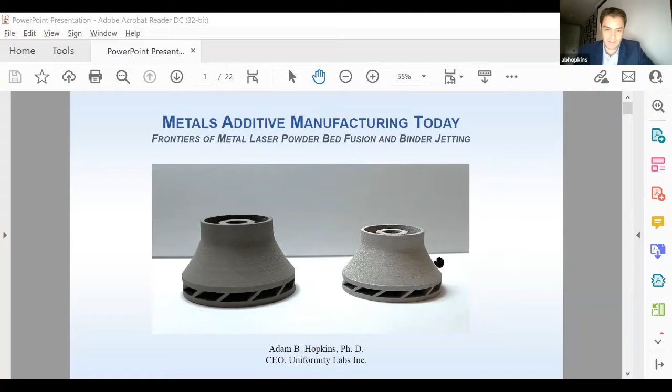Great, okay, let me go to full screen mode here. All right, background's covered. I'll start with an overview of technologies.

Then I'll go into detail about laser powder bed fusion and its physics, borrowing from the work of peers—a lot of the work at Lawrence Livermore National Labs is quite exciting on this front—and areas of potential for development, where the challenges are in laser powder bed fusion. I'll focus on the most salient technical challenges that I don't think the commercial world can meet, where there's great opportunity for national labs to step in, or where they've already stepped in, or for academic work to solve problems that might otherwise not be solvable by the commercial world. Then I'll move into binder jetting, same type of story.

And I'll talk about data collection, because there's not enough of it right now to actually do a solid job of addressing some of these problems.

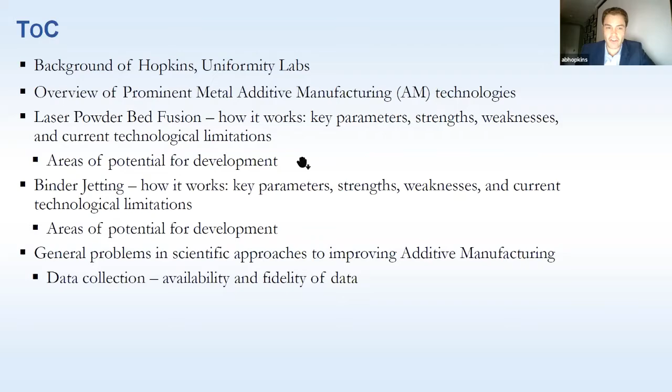So some background on Uniformity Labs: it's an additive manufacturing feedstock company that also develops print solutions. We have 8 large or medium format industrial printing machines for metal additive manufacturing—5 laser powder bed fusion, 3 metal binder jetting. We work at the forefront of printing technology, deploying these ultra-dense powders, which are roughly speaking a bunch of big particles with different sizes of smaller particles filling the gaps between them. There's a little more to it than that, but for now I'll say that, and we work on deploying these products and learning how to print them in these machines.

In this process, we work with some of the most advanced experimental printers out there, so we gain a pretty good view of what the problems are—not just with today's commercialized technology, but with technology that might be commercialized in 5 to 10 years.

So, some more stories there. We have various raw materials. We've developed, I believe, as many or more raw materials for binder jetting, different alloy classes, than anybody else on the commercial front. We have those available.

And with respect to powder bed fusion, we have materials available as well that introduce substantial changes into the physics. I'll only bring this up not to tout our company, but to point out that by changing the feedstock and changing the parameters in laser powder bed fusion, you can enact rather substantial changes. You can, for example, print with 2 to 3 times the throughput without changing laser power. You have to change laser speed, scan a little faster if you want to print faster. But then the result is the physics can be modified to achieve more reliability, less residual stress in the process, faster printing - things the industry needs.

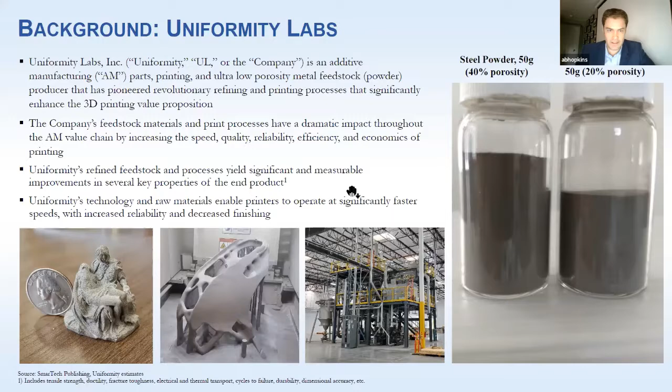And then you scan a laser across the top in the outline or profile of the part you want to print. So if you wanted to print a pipe or an annular ring, you'd roughly speaking scan in a circle, and you'd melt. You seek to fully melt, in laser powder bed fusion, that circle, and then you drop the build stage, spread more powder on top, and do it all over again. At the end of the day, you've got a pipe sitting in a bucket of powder, fully ready to go, possibly with some residual stress.

Great - what are the advantages of this technology? It's very highly accurate, but you do have to deal with residual stress warpage as the part cools. But you can meet machining tolerances in many cases, provided you're properly supported. That's a big deal for the industry because almost every complicated assembly of parts is in fact specified to CNC machining tolerances. So you really want to meet those or come close, so that you don't have to take your part out of the build bed and throw it into a CNC, because that's very expensive.

It works very well for easily weldable alloys - eutectic alloys for aluminum like AlSi10Mg or A357, 356, that's an aluminum silicon alloy. It doesn't work very well - I'll give an example later - right now for, although there's some good work on this, for example, aluminum 6061. 6061 is the most commonly machined alloy in the world by tonnage. I think together all tonnage of 6061 machined exceeds all tonnage of all other materials in CNC machining. So it's an important one, but it's non-eutectic.

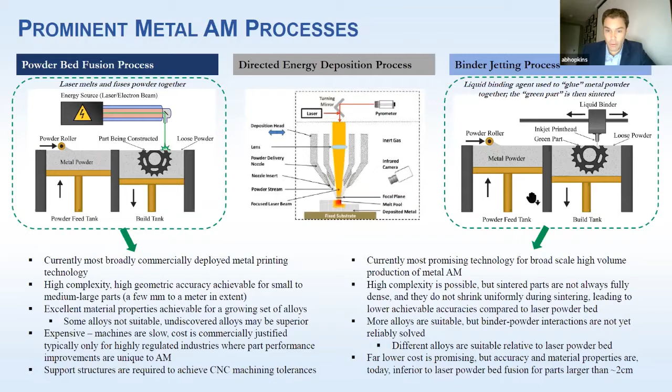So if you want to think about deploying additive manufacturing in metals in the hundreds of thousands of tons, and we are thinking about this in the industry and looking to this in the future, say in the automotive industry, which is investigating it and spending money on it, then you need to be able to accurately build larger parts. For that, you need to address the shrinkage problem, the cracking problem, and the mechanical properties of the material. Most importantly, it needs to be repeatable.

Great, so jumping into powder bed fusion. I'm going to do a quick primer based on a few papers I've pulled from Lawrence Livermore, as well as from Uniformity results. If you don't know much about laser powder bed fusion and want to know more, I highly recommend these references. Great work once again.

The metal below the laser absorbs most of the laser energy. The powder absorbs a little bit of it. And then as you move, you create this melt pool. Particles are blasted all over the build chamber, as you've seen in high-speed videos. They fall in from the sides of the melt pool into the melt pool, and they fly out - basically they're little rocket ships. They get very hot very quickly, plasmarize or vaporize, and it ejects them very quickly. I'll show some data on this in a minute. And some of them stick and melt.

You also have Marangoni convection going on here. As you move the laser away, this lower density, extremely hot melt is at vaporization or close to it in some parts of the melt pool. As it cools, you have Marangoni convection - the lower density cooling metal pulls the metal from the hot spot backwards, in the opposite direction of the scan track. And that's what fills in the gap.

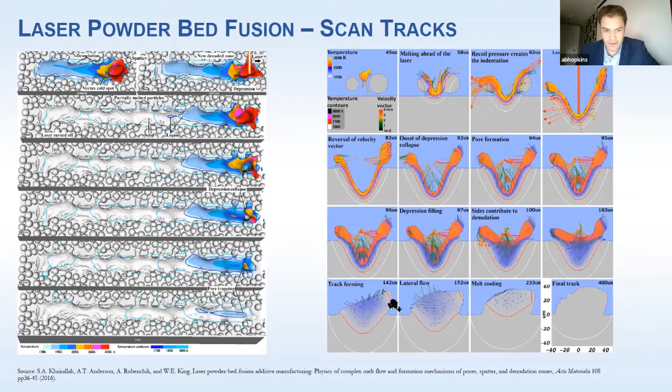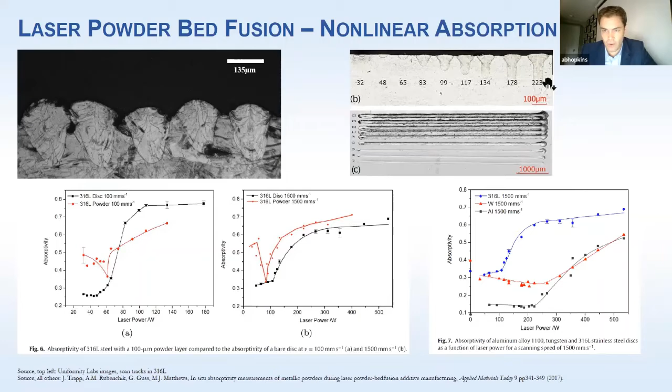This matters because if your energy intensity is too high, you'll overheat aluminum. I think I've got a chart here. Yeah, there we go. And as you overheat that aluminum immediately adjacent to where your laser beam is - let me skip back so I can tell you what I mean. If this is your drill, your scan track here, then by adjacent I mean to the left and right of this image - in the lateral directions, not in the buildup direction.

And what happens is you have supersaturated hydrogen in aluminum and some other materials in that solid. If you have too much intensity, you heat that solid, and by the time the supersaturated hydrogen comes out of solution and drifts into the melt pool, and when it reaches the melt pool, the time scales are on the order of tens of microseconds for the solid diffusion of hydrogen at high temperatures - not for the liquid - such that the liquid at the top of the track has cooled, and you end up trapping the hydrogen.

For the liquid supersaturated hydrogen, that just leaves in nanoseconds or even picoseconds. You don't care about that. It's the supersaturated hydrogen in the solid that matters.

And here's what happens. So if you have this spot, D4 sigma 56 microns, it's this regime where we're getting that supersaturated hydrogen migration into the melt pool, and it's being trapped. And then if we change the spot, all parameters identical, to 92 microns - so just a little bit of a change in spot diameter - you can see you get rid of most of the hydrogen porosity because the length scales and time scales are not proper for retaining that hydrogen in this particular case. All right, great.

Energy intensity - I've given just an example of why it's important. Energy density is, for most alloys, the most important parameter.

And I'll focus on one thing: if you have denser powders on the bed, for example, I mentioned this earlier, then the energy densities you can print at - for example for 316L - you can go into the 26, 28 joules per cubic millimeter range, which there's a whole mountain of commercial papers out there saying is impossible. You have lack of fusion everywhere, you have defects everywhere. What do I mean by that?

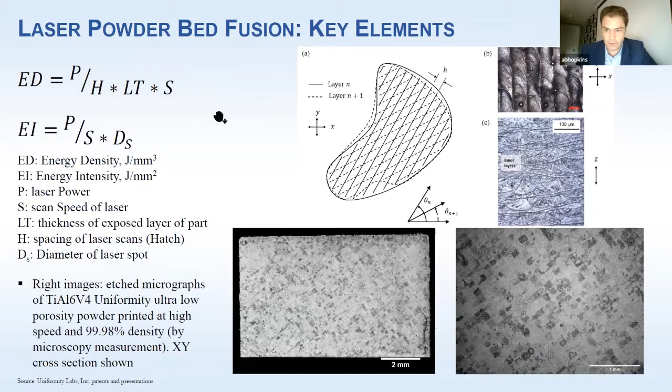Hold on, I think I have some pictures. Oh, I may not, so I won't scan around, but you get these giant defects - you get 95% density. With respect to, if you have a very dense powder on the bed and your melt pool is therefore cooler because you have more powder falling into the melt pool, as well as you have smaller particles as well as larger particles, you might be absorbing more energy from those particles because the smaller particles are like little antennas - they have plasmonic resonance with the laser beam.

If you tune everything properly, cutting to the chase, you get a lot more melting per scan track, and you can go to very low energy densities. But typically you're on the order of about 60 to 80 joules per cubic millimeter printing today. With special powders, maybe 20 to 35. So, non-eutectic alloys - I'll briefly mention aluminum 6061. I talked about this earlier in brief.

You can see here hot cracking—this is not even etched material. This happens because if you look at the phase diagram of 6061, you have a copper-rich or alloying-element-rich phase that solidifies before the aluminum phase, rapidly solidifying. Since it has a different density than the aluminum, it solidifies, and then the aluminum solidifies separately because of the different densities in solid form. Then you get these cracks in your structure, and this material becomes more or less useless for structural applications because it's full of cracks.

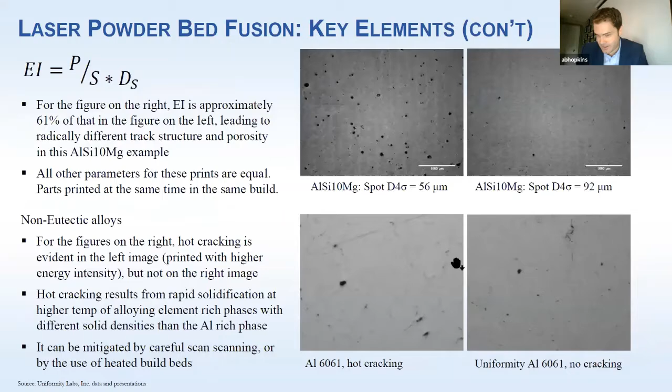The build bed temperature—I think I even forgot to put this on here—makes a massive difference in aluminum 6061 hot cracking. Your mechanical properties would be radically different for a build bed temperature of 300 degrees versus 100 degrees, so you need to pay attention to that. The powder size, if your powder was 60 micron D50 monomodal as opposed to 40 micron D50 monomodal, you'd see a radical difference. The D90 and D10 of the powder matter as well—just again and again and again. This is the biggest problem in learning from the data that's out there: you need more data. You need to really know what happened, or the conclusions you draw may be erroneous.

And then doing all this, the question is, if you are tracking all this, if you have a stable parameter set—and by parameter set I mean powder, layering, scan strategies, beam spot size, the whole story, environment—then there are certain part geometries that you can create that warp and do not warp, that oxidize and do not oxidize, again very material specific. Aspect ratios you can print and cannot print relate to residual stress. This becomes, again, a pretty complicated problem.

There are softwares out there that bring this into the thermoelastic regime. I'll get to those in the binder jetting portion. They can predict shrinkage and warpage, which is very interesting if it can work. Softwares kind of work, they kind of don't today—they're problems that still need to be solved.

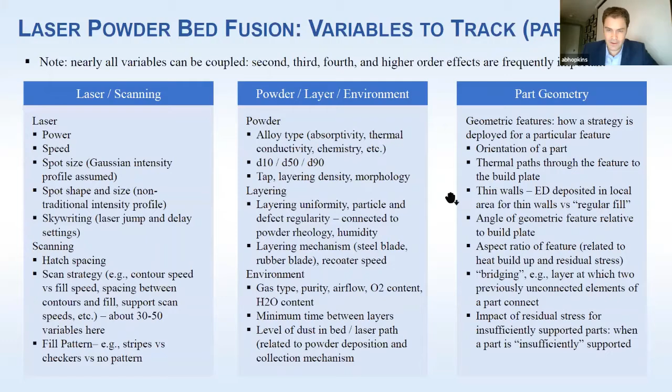So just one more example. This is something that we printed last Thursday, and I thought it looked neat. This is 316L. This part is printed intentionally to demonstrate this, but it's insufficiently supported thermally.

Since 316L, I think we're at about 1500 ppm oxygen in this build, it will in fact oxidize. We're getting above 500 or 600 degrees Celsius because there aren't enough pathways for the heat to leave, so you end up heating the substrate high. You'll have different amounts of residual stress at that temperature.

If you put a support in the bottom of this, instead of having a 0 degree angle, you put a support attaching to the bottom, this goes away. Sorry, I don't have a picture of that. Just one more example of something to pay attention to.

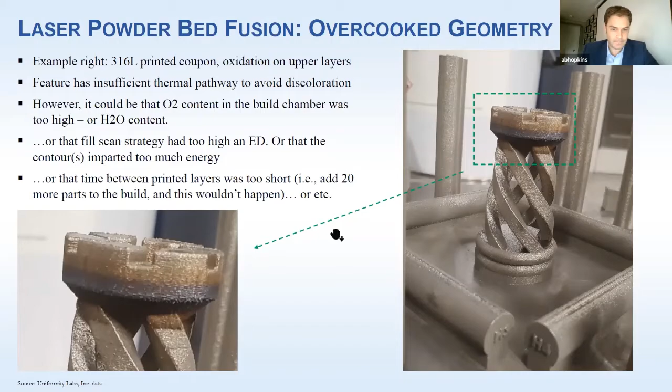I think I've covered all my thoughts on existing issues, and I'll leave these for reference if you're interested. But this first point I want to emphasize: all the salient variables are rarely tracked. The ones I put on the previous page, they're never all tracked and published in papers. They need to be, if the data is going to be good.

They're not always all salient, but the vast majority are. They're never all reported. Even if they were, their impact on different geometries, concerning the strong interaction between variables, is not fully known. They're certainly not known when you start changing alloy compositions and capabilities. Scalable strategies do exist, but it's tough to make them reproducible in different geometries of parts because of problems like this.

Real-time layer monitoring of layer defects solves most of the problems in powder bed fusion. The commercial problems you see today are, oops, this layer didn't layer well for a few layers, maybe because you had a geometry that began to warp and the recoater blade smashed into that geometry, and then you get poor layering, you get a streak in the build bed.

There's real-time monitoring of layers. You use high-resolution cameras and automated image analysis. It's fast, it's cheap, it's available on printers today. It's not widely deployed, but it works.

And what it does is it tracks and says, oh, there was an issue with layer 262 through 267, you're going to have a defect there. That data's out there for that. That's useful, and on certain printers, it's there all the time.

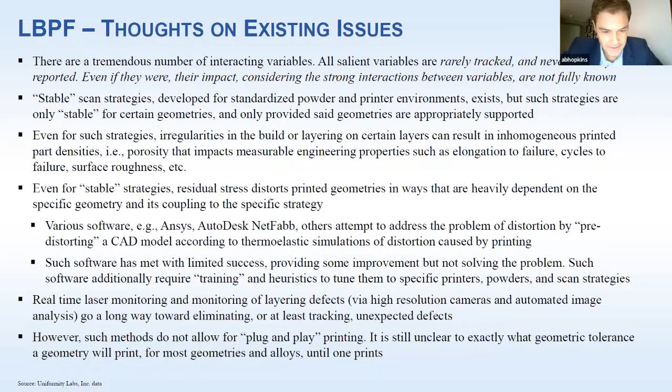All right, great. I'm paying attention to time and questions, so I'll go a little bit faster through binder jetting. I'll try to build on the powder bed fusion knowledge when I talk about it.

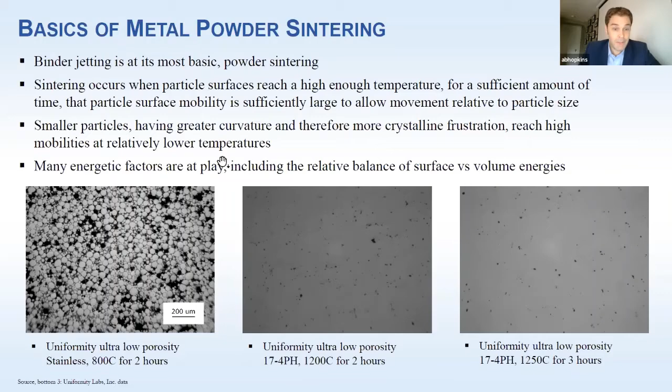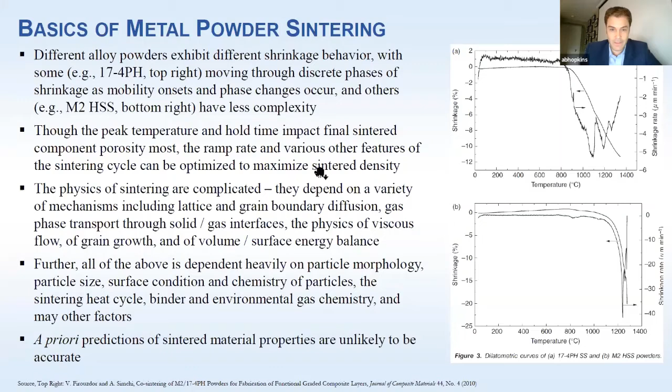It's a little bit easier for some other materials. This is M2 high-speed steel, not quite as crazy in the physics. I'd say there's still a lot to learn and develop about a priori sintering models. It's complicated—there's a lot to be done.

The binder powder interactions are really important. I talked about powder—naturally denser powder can do a lot of good. Finer particles have higher mobility, so they can sinter more at lower temperatures, but then they don't spread very well. The rheology is poor, the cohesion is too high. Lower cohesion powder with finer particles is a great idea. I think I'm very subjective here—that's one of the things Uniformity Labs does, but it works.

So binder powder interactions are important. When you're layering the powder, are you laying down binder in a way such that it's evenly absorbed? And the printer itself has many different print heads, tens of thousands, jetting picoliter or nanoliter size drops at a very rapid pace. Are they jetting them properly, repeatedly? Are the nozzles getting clogged? It's a hard problem, but you can get repeatable systems—that's what I'm getting to.

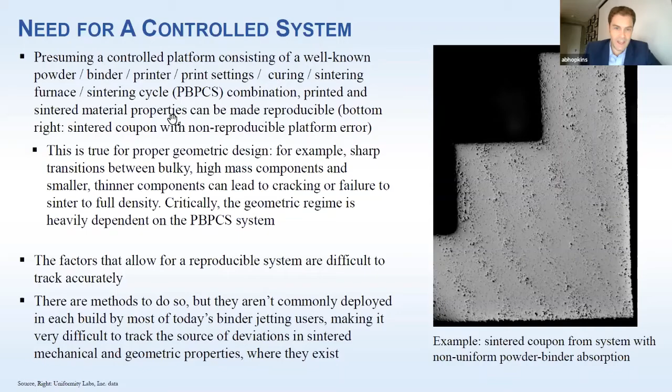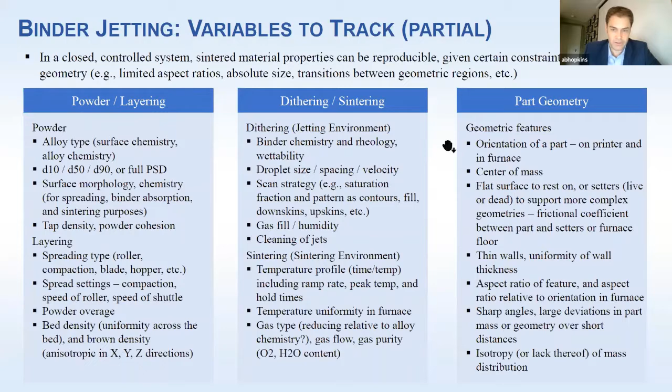The ability to do this is important for binder jetting, because if you can do it, it can be applicable to larger and larger parts, making this a viable technology in the hundreds of thousands of tons, not just in the low thousands. I don't know what the other comparison is, but there are technologies out there that can do this. To do this properly, you need a controlled system—you need to know it's controlled. And then from that controlled system, you can use thermoelastic models instead of powder sintering physics, which are very complicated. Thermoelastic physics are still complicated, but less so, and you can build these programs that lead to this result.

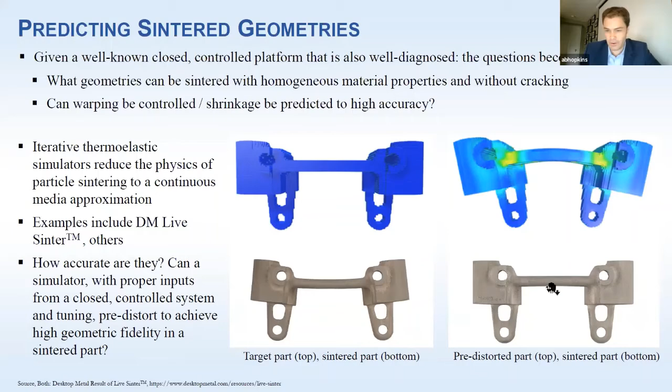The same concluding thoughts: all salient variables are rarely tracked. They should be. If you're going to use algorithms to address this, you need all the variables, or at least the vast majority, or you're going to have uncontrolled results that aren't reliable. Data is even less often collected in jetting, although there are ways to collect it in controlled experiments, and some folks do, but you need to get that data.

And then I'll jump to the sintering. Once you have a controlled system, one thing you might be able to do is use data analysis, big data analysis, machine learning too. This is just one suggestion, but to predict warping or to see what the uncontrolled warpage is.

So pre-distorting is great, but you still want to know at the end of the day there are variations in the powder bed. The powder bed might be 52.3% dense on the right side and 52.5% on the left side. So you need to predict what type of warpage or uncontrolled shrinkage you're going to have as a result of that variation.

You need that because in a commercial setting, if you're going to manufacture at scale, you need to assume the worst case at 99.9% repeatability and then solve for that case. Just predicting what those variables and those changes will do hasn't been done very well, and would be very valuable in getting some kind of predictive simulations. It's a lot of work, but interesting nonetheless, and it would help the industry.

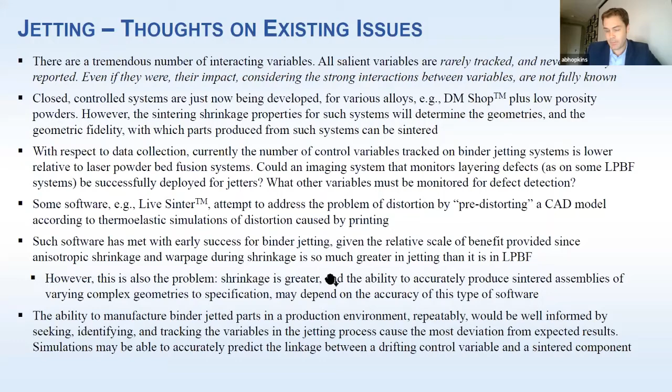There's lots of things they're doing that is beyond their capability, like the ideas I was talking about a minute ago. There's too much physics involved, too much math to deploy commercially. Data processing is enormous, and I think there's a lot of opportunity there.

All right, great. Thanks very much. I'll pause there, and hopefully there's a few more minutes left for questions.

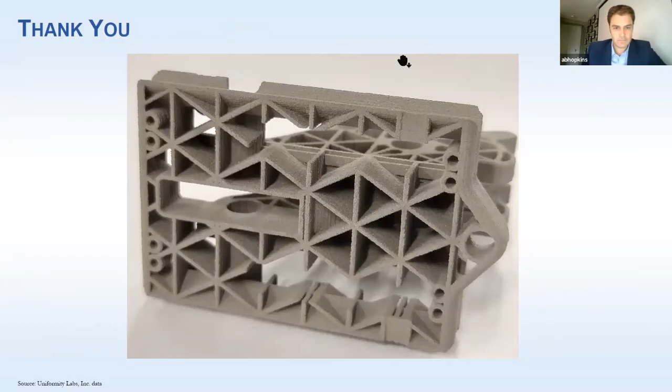Thank you, Adam, this is a very, very interesting talk. Thank you. Do we have any questions from the audience? Yeah, sure, go ahead, Mark.

Hi, thanks Adam, really nice talk. This is outside my area of expertise, but I'm curious — you mentioned surface chemistry and the environment during sintering, and its impact. I'm coming from the chemistry side, so I know nothing about what's being done in this area, but it seems pretty ripe for process chemistry, surface chemistry, whether it's almost independent of the process used to make the part — whether it's the bed, the binder, or the laser — surface chemistry, whether in the process or liquid phase, could play a huge role in this. Has much work been done using these techniques to assess the benefits of using interfacial chemistry to help in some of these manufacturing techniques?

Yes, and I can say there has been a lot of work done in the commercial space, but I'll be quite honest, we don't fully understand what we're doing. It's more of an engineer's shotgun approach — we tried this and it worked, and we know what's happening, but we don't know why it's working.

I'll give an example. For binder absorption, it's very clear — take 17-4 PH, for example. You need to bake that powder above 180, 200 degrees C. You need to get some oxygen into the surface, a little more than is produced by the gas atomization process, or you typically won't absorb, for example, an aqueous binder. You won't have enough wettability to get even absorption. So there's a binder-powder interaction.